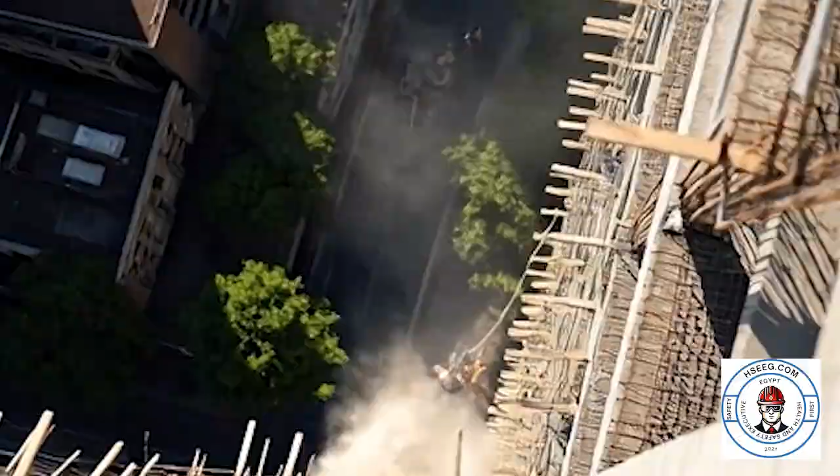On any construction site, there's a danger that's always present. It's not a piece of machinery, it's just gravity. Today, we're diving into OSHA's Subpart M.

These are the rules designed to fight back against the number one killer in construction: falls. Look, this isn't just about regulations, it's about making sure everyone gets home safe. Let's get right to it.

So why all the focus on this one specific rule? Well, this quote from OSHA pretty much says it all. Falls aren't just one of the problems, they are the leading cause of death in the entire industry. This isn't some abstract risk, it's a daily, lethal threat that every single worker needs to be aware of.

And this number really drives it home: 1 in 3. Just let that sink in for a minute. For every 3 tragic deaths on a construction site, one of them is from a fall. That's exactly why Subpart M exists, and it's why every single detail we're about to cover is so incredibly important.

Okay, so with stakes that high, OSHA drew a very clear line in the sand. This section is all about that fundamental rule, the one that tells you exactly when fall protection becomes mandatory. It's probably the first question you should be asking on any job. It seems like a pretty simple question, right? But the answer actually has 2 really critical parts, and knowing them is the absolute foundation of fall safety.

So when does the requirement officially kick in? And here it is: this is the famous 6-foot rule. On the left, you've got the general standard. If you're working 6 feet or more above a lower level, you have to be protected. And why 6 feet? Well, that's the point where a fall can easily become fatal.

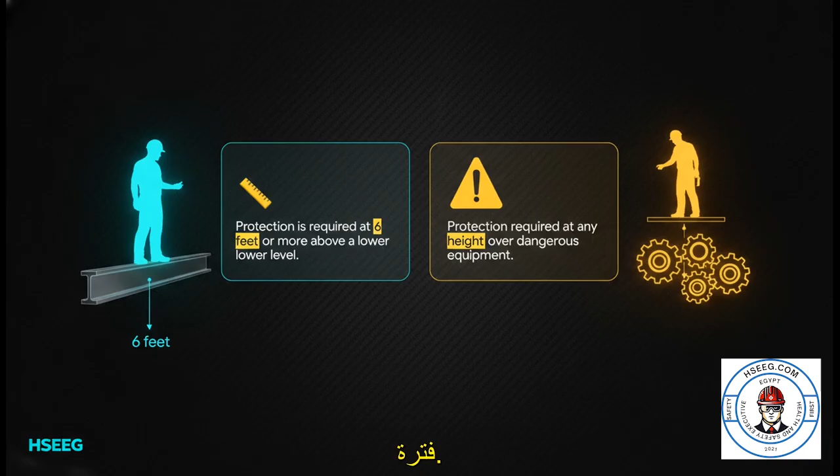You know, before any work even gets started, the responsibility begins with the employer. Safety isn't something you just improvise, it has to start with a plan. First, they need to make sure the surface you're standing on is actually strong enough. Then they apply that rule we just talked about. They select the right gear for the job, and critically, they make sure every single person knows how to use it.

All right, so you've identified a fall hazard. What's next? What do you do about it? Well, OSHA gives us a primary toolkit of what they call conventional systems. You can think of these as your go-to first line of defense. And here are the big 3.

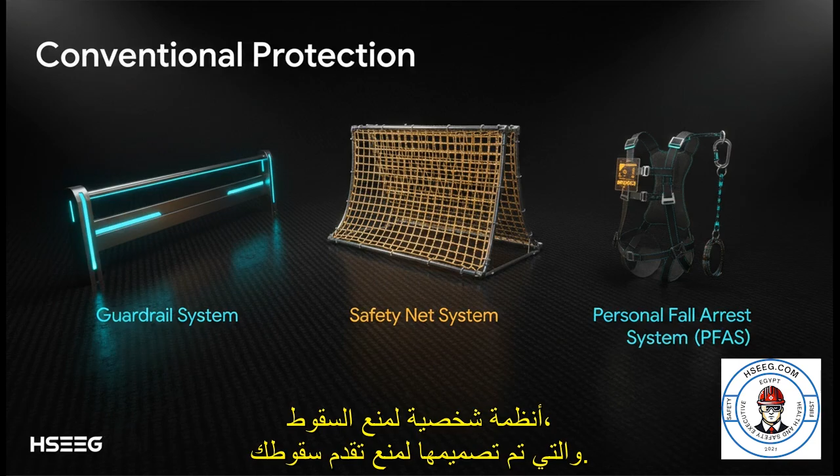You've got guardrails, which are designed to prevent the fall from ever happening. You've got safety nets, which are there to catch you if you do fall. And you have personal fall arrest systems, which are designed to stop your fall in progress. Let's break down each one.

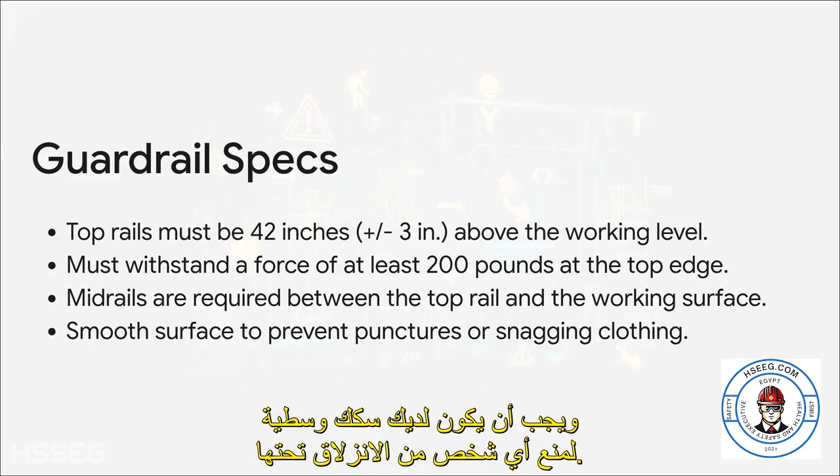First up, the guardrail. It's often the simplest and, frankly, the safest solution because it's a passive system. That means you don't have to do anything to make it work. It's just there, a physical barrier that literally stops you from going over the edge. But here's what's really important: a proper guardrail isn't just any old railing. OSHA is super specific here. The top rail has to be 42 inches high, give or take 3 inches. It has to be strong enough to withstand 200 pounds of force. And you've got to have midrails to prevent someone from slipping underneath. These details matter a lot.

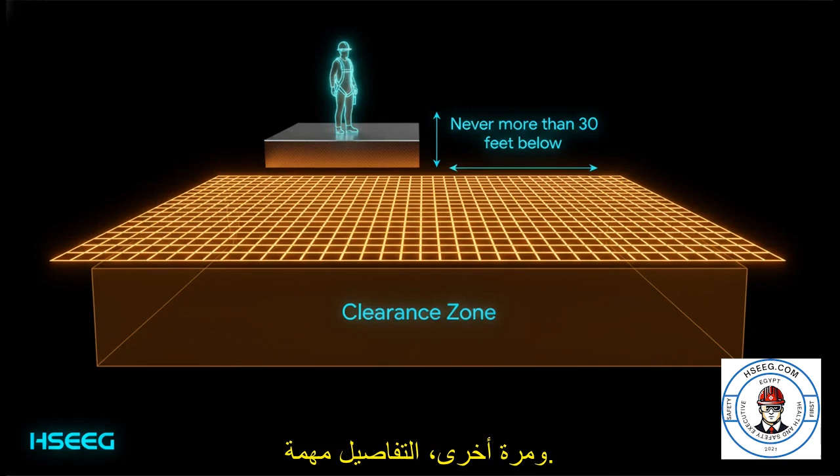Next in the toolkit is the safety net. Now, unlike a guardrail that prevents a fall from happening, a net is there to safely catch you after a fall has already started. Think of it as your second chance. And again, the details are critical. The net has to be as close to the work surface as possible, and never more than 30 feet below. There also has to be enough empty space underneath it so you don't hit the ground anyway. And crucially, it needs to be inspected every single week. A damaged net is no net at all.

And finally, we get to the most personal and active form of protection, the Personal Fall Arrest System, or PFAS.

This is the harness and lanyard combo that you actually wear. It moves with you, and it's designed to stop your fall before you hit a lower level.

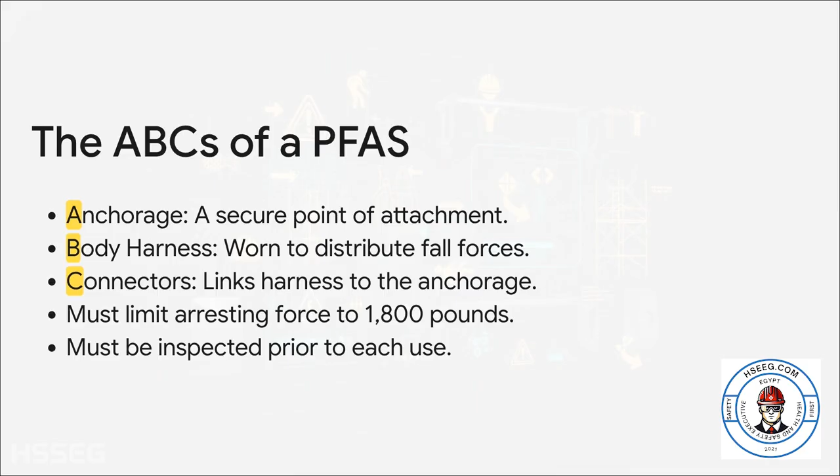A PFAS always has 3 key parts, and it's easy to remember with the ABCs. A is for anchorage, the secure point you're tied off to. B is for the body harness you're wearing. And C is for the connectors that link the two together.

And remember the golden rule: this entire system has to be inspected before every single use.

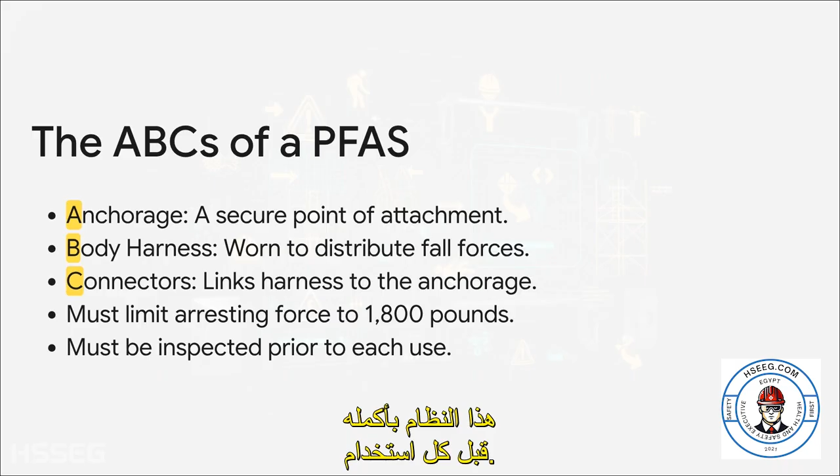So we've covered the gear, the hardware. But the best equipment in the world is completely useless if people don't know when, where, and how to use it. This is where the human element comes in, the plans and the training that actually make the system work. Now, sometimes you might hear about something called a fall protection plan.

It is so important to understand that this is an exception, not the first choice. An employer can only use one of these written plans if they can prove that using guardrails, nets, or a PFAS is either impossible or would actually be more dangerous.

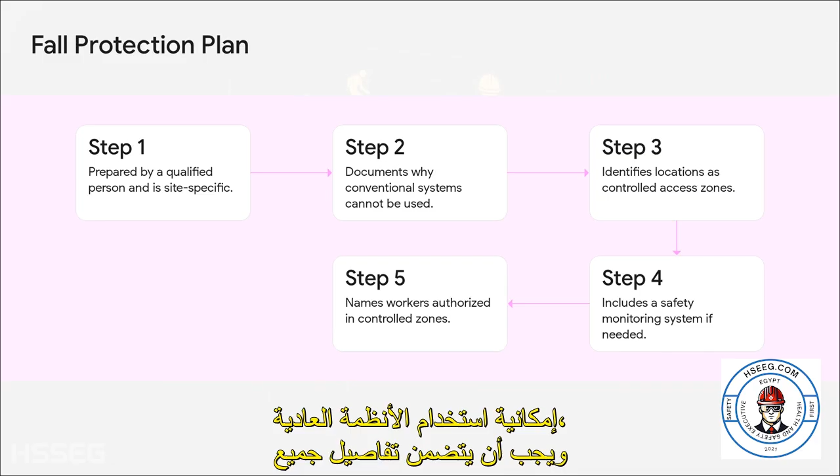And a plan isn't just a piece of paper. As you can see, it's a very structured document. It has to be prepared by a qualified person, it has to explain exactly why the normal systems can't be used, and it has to detail all the alternative procedures like safety monitors or controlled access zones.

I can't say this any clearer: under OSHA's Subpart M, training isn't a suggestion, it's not a nice-to-have, it is a mandatory requirement. Every single worker who could be exposed to a fall hazard must be trained. There are no exceptions. And that training has to be thorough.

It's not just about how to put on a harness. It's about recognizing hazards, knowing how to set up and inspect all the equipment correctly, understanding how all the systems work, and knowing the specific rules in Subpart M. At the end of the day, knowledge is just as vital as the equipment itself.

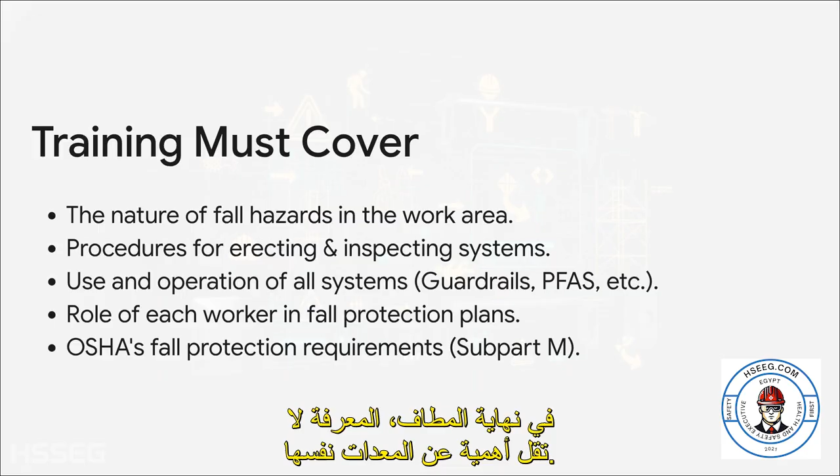So let's bring all of this together. We've got the rules, we've got the equipment, we've got the training. But to truly get rid of that one-third statistic we started with, it takes more than just checking boxes. It really requires a shift in mindset.

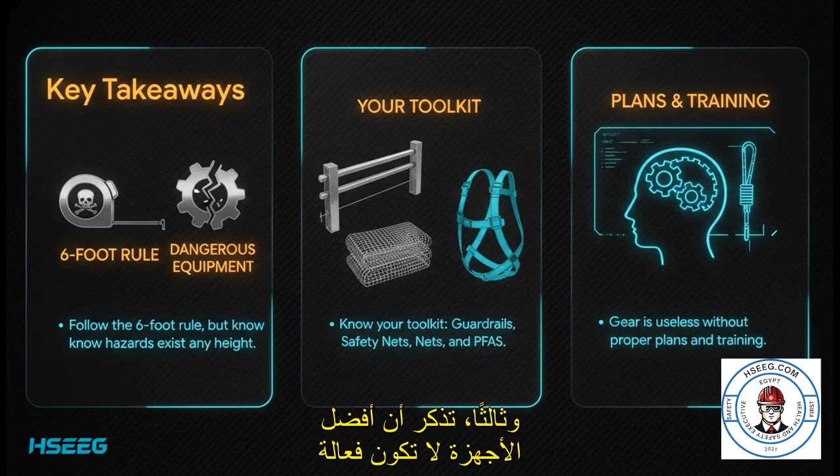If you remember anything from this explainer, make it these three things. One: the 6-foot rule is your baseline, but dangerous equipment makes any height a fall hazard. Two: know your toolkit, guardrails, nets, and PFAS. And three: remember that the best hardware is only effective when it's backed by solid planning and thorough training.

And that leaves us with this one last critical question. Compliance is about following the minimum rules to avoid a fine. But safety is a commitment to making sure everyone goes home at the end of the day. So take a look around your own workplace and ask yourself, are we just following the rules, or are we truly committed to being safe?

So what is this? 291? Well, according to the Bureau of Labor Statistics, that's how many construction workers died from falls to a lower level in just one recent year.

And look, that's not just a statistic. That's 291 families changed forever. It's the number that proves without a doubt that falls are the leading cause of death in construction.

But here's the thing. This isn't some unavoidable risk of the job. It's a preventable reality. And that is exactly why OSHA standards are so specific and so incredibly important to follow.

And this isn't a new problem. This quote from OSHA really drives it home: for as long as we've been keeping track, about one-third of all deaths in construction come from falls. This is the fundamental why behind every single rule we're about to get into.

So, when does the danger officially kick in? When do you need to have protection? Well, OSHA has a very clear, non-negotiable answer, and it all boils down to one simple measurement.

And here it is, the 6-foot rule. This is really the bedrock principle of fall protection. If you are working 6 feet or more above a lower level, protection is not an option. It is absolutely mandatory.

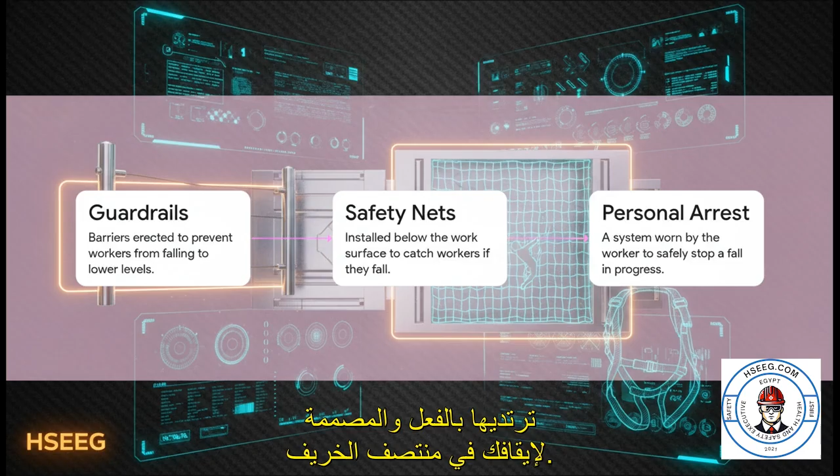But listen, just having these systems on site isn't enough. Not even close. Each one has critical specifications. These are numbers you absolutely have to know to make sure they're compliant and that they're going to work when you need them most. All right, first up, guardrails.

They seem simple, right? But their effectiveness is all in the details. There are 2 key numbers every single person on site should be able to spot check in a second. The first number to burn into your memory is 42 inches. The top rail of that guardrail has to be 42 inches, give or take 3 inches, above the walking surface. Any lower, and you could just tumble right over it. Any higher, and you could slip underneath.

And the second number is 200 pounds. That top rail has to be able to withstand at least 200 pounds of force. That's basically the impact of a large person stumbling and falling against it. It can't fail. Now, what if guardrails just aren't practical for the job?

Well, let's take a look at safety nets. Their whole job is to catch you, but their placement and their preparation, that's everything. For nets, the critical number you have to know is the installation distance. Safety nets have to be as close as possible to the working level, but, and this is a big one, never more than 30 feet below. Any further than that, and the fall itself could cause a serious injury, even if the net catches you.

And you can't just look at a net and assume it's safe. No way. Before anyone works above it, OSHA requires a drop test. This means dropping a 400-pound bag of sand into the net to make sure it holds. It is a mandatory proof of performance.

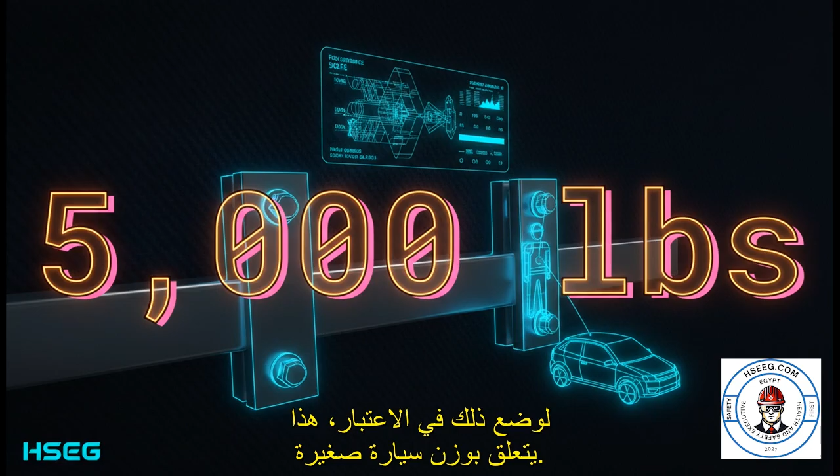Now, this is a really critical distinction. While the anchor holds 5,000 pounds, the system itself is actually engineered to limit the arresting force on your body to 1,800 pounds. This is an absolutely crucial safety feature designed to prevent severe internal injuries during a fall arrest. And this perfectly illustrates one of the most critical non-negotiable rules of fall arrest.

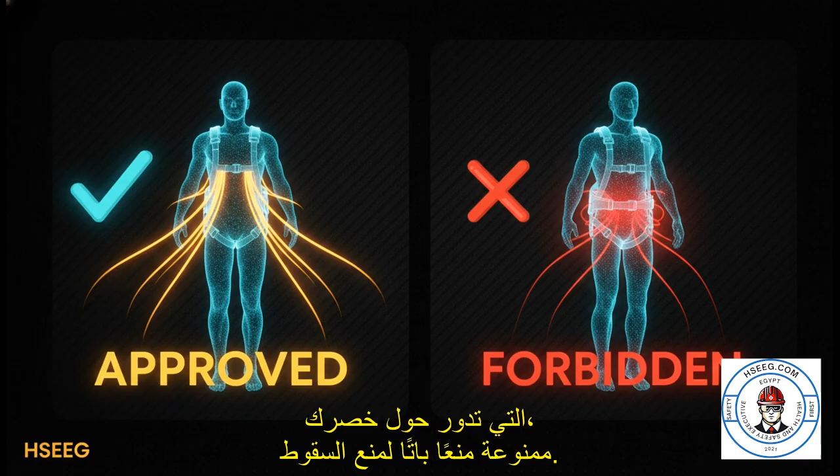Body belts, those simple straps that just go around your waist, are strictly forbidden for fall arrest. They concentrate all that force on your abdomen and can cause fatal injuries. Only a full body harness, which spreads that force across your thighs, your pelvis, and your chest, is ever acceptable.

Period. So, we've covered the gear, the specs, the rules. But you know what? The best equipment in the entire world is completely useless if the person using it isn't prepared. Safety isn't just about hardware, it's about the human element. This is exactly why OSHA mandates comprehensive training.

Every worker who could be exposed to a fall hazard has to be trained by a competent person. They need to know how to spot the dangers, how to properly use and inspect their own gear, and they need to understand their specific role in the site's overall fall protection plan.

But what about the dangers lurking inside the worksite itself? In this explainer, we're going to dig into those overlooked hazards and talk about the one thing that's the ultimate safety net for every worker: solid, comprehensive training. So what are these other critical hazards? The answer boils down to two key areas that are just as deadly as an open edge, but honestly, they're often a lot less obvious. Let's break down exactly what every single person on a job site needs to be looking out for.

First up, let's talk about special hazards. We're focusing on two huge risks here: openings that you can fall through and objects that can fall on you. Take a good look at this number, 6 feet. According to OSHA, this is the magic number, the critical threshold. Any hole or opening a worker could possibly fall through, if that fall is 6 feet or more to a lower level, it has to be protected, period. There are absolutely no exceptions to this rule.

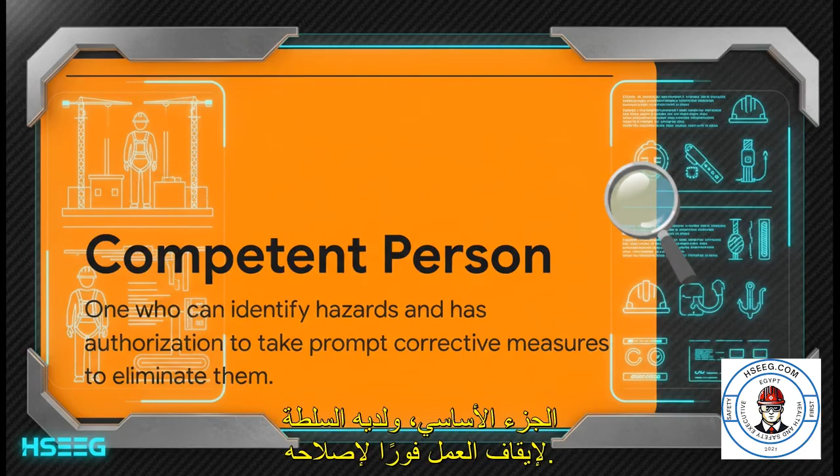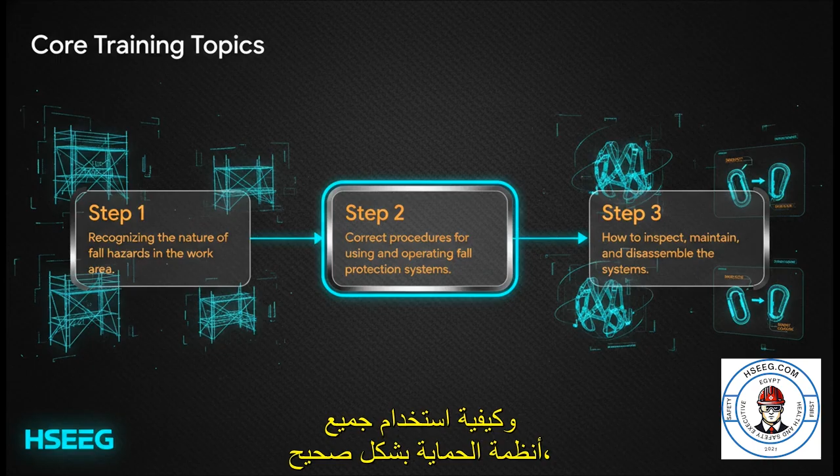And what does this training actually need to cover? At the very least, every single worker needs to learn 3 things: how to spot fall hazards in the first place, how to use all the protection systems correctly, and—so important—how to inspect their own gear before every single use.

And finally, you really can't miss this part: just saying the training happened isn't good enough. The employer must keep a written certification record for every worker. This piece of paper is the official proof that shows who was trained, when they were trained, and by whom. It ensures everyone is accountable.

So what's the big takeaway here? It's that safety is a whole system. It's about having the right gear for specific hazards, and then backing that up with certified training that truly empowers every single person on the job.